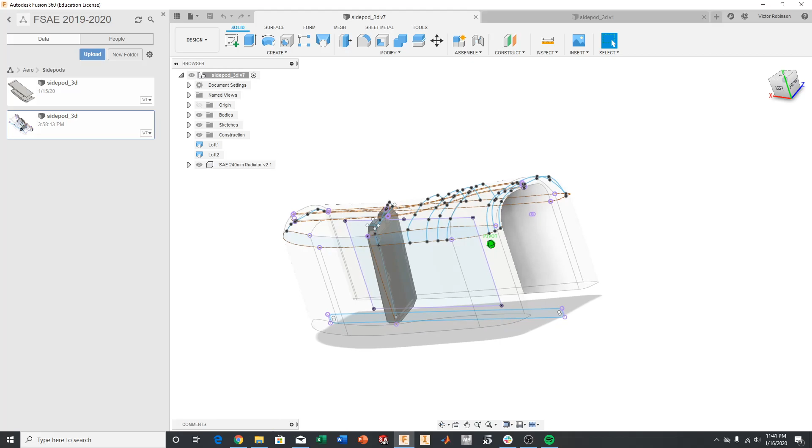In this video I'm going to show you how to loft basically a sketch, two sketches in this case. We'll be lofting these two pieces together such that you get something that looks like this. And so lofting is essentially you telling the computer or the computer software that you want to join two sketches together in 3 dimensions, and in doing so you can create complete bodies with simple sketches.

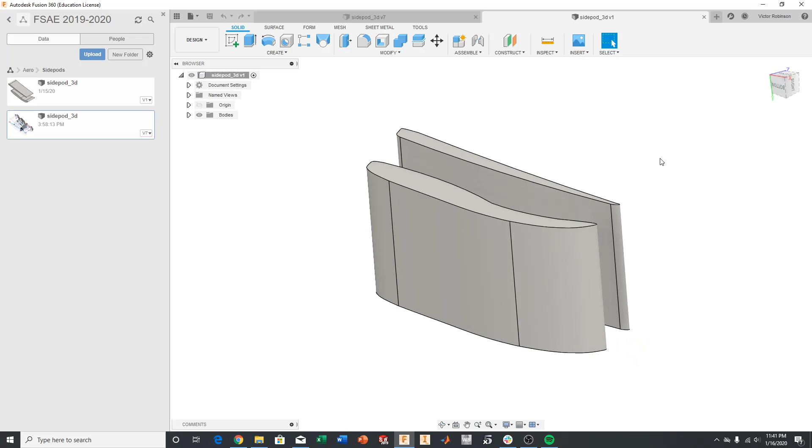In this case we are looking at a side pod, so I started with something like this. We have a sketch, two sketches here that were extruded on the upper sections in the X and the XY plane, and over here essentially is what would be housing the radiator right here in this section. If we were to look at the top view right here, the radiator would go right here, and we have the front here. So what we want to do is enclose this. We want a complete structure. We don't just want an ugly extruded sketch.

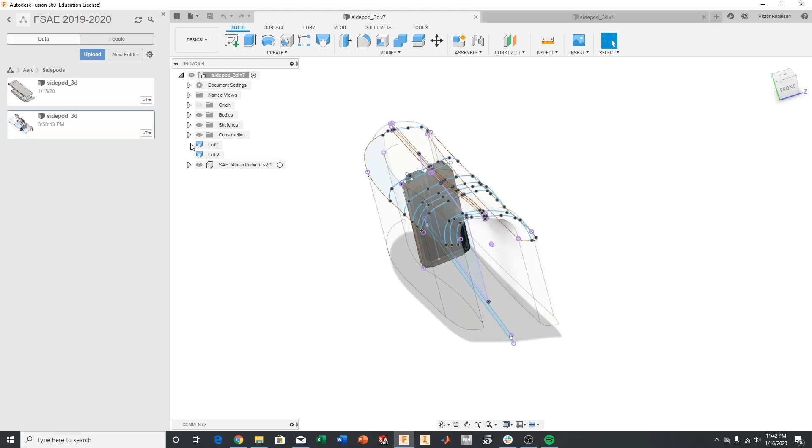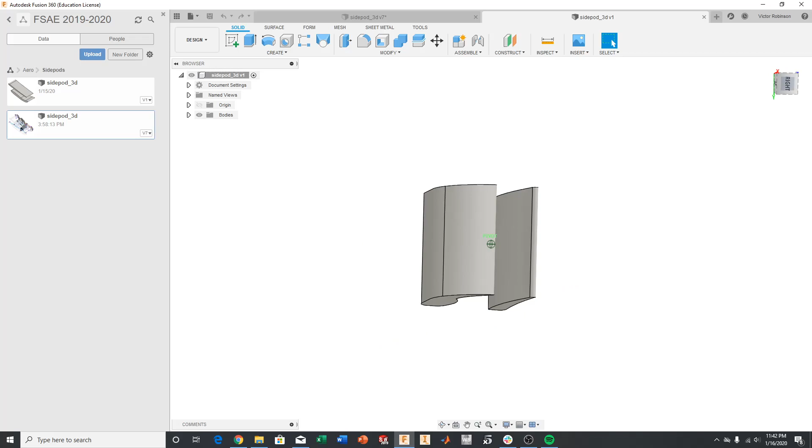So kind of what I'm showing you here is what you could expect. So let me get rid of the translucency or opacity of the object here, so you can see what it really looks like. So in this view you can see it's enclosed. I went from this view here, went from this to this, and you can see I have the radiator models in there as well.

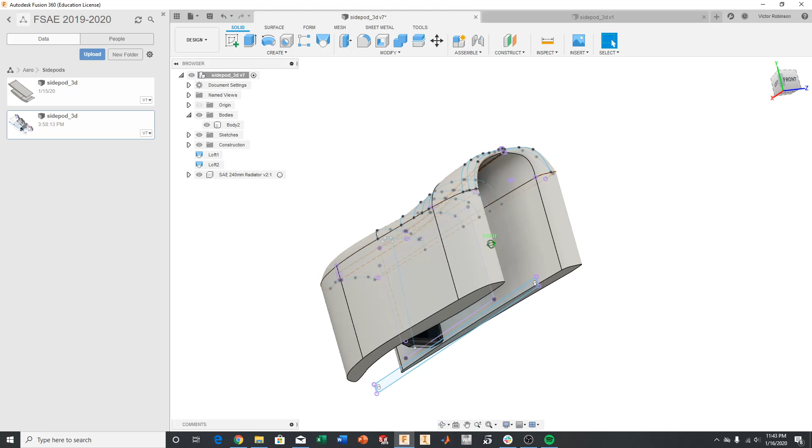And the whole idea is that this will sit on the side of the car, and so what I will be showing you then is essentially how to loft. And so I will be completing the bottom section of it, and bear with me as I struggle. Sometimes I may struggle, but let me explain a little bit here. So what I have here in the middle is another sketch. So what I decided to do is create an additional sketch in this plane here. So you can kind of see the outline I made here.

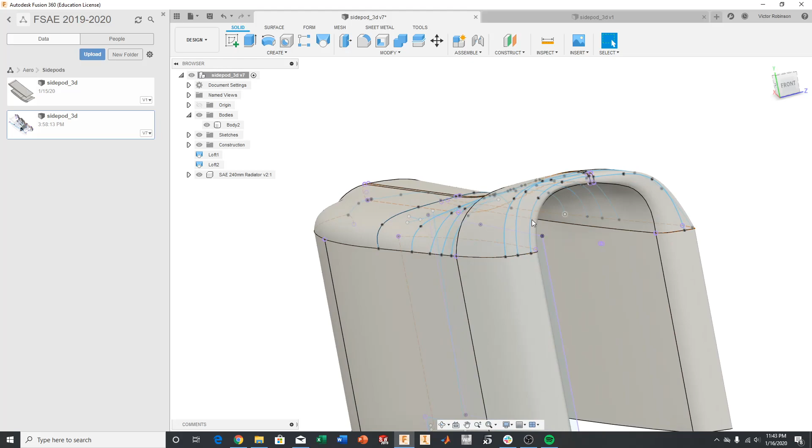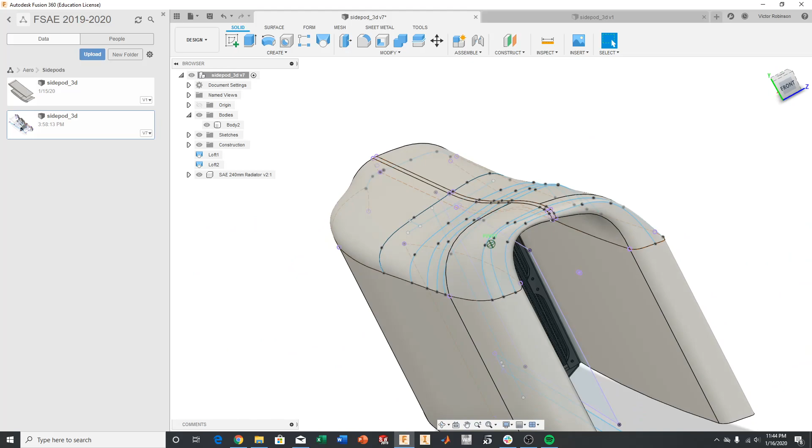What I decided to do is to kind of sketch out my general shape on the Y, or in the vertical component here, and then I would join these faces to this new sketch here on each side. That was my strategy on how to do it, so that I got the shape that I wanted. If you can see here, these blue lines are what are called rails. So essentially what I did was draw a bunch of lines in 3D. So they're not constrained to one specific plane. You can see that they move in every direction, essentially the X, Y, and Z.

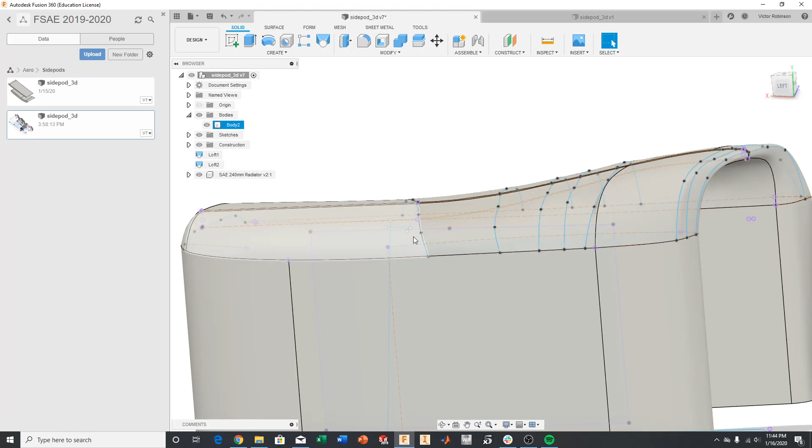And the whole idea is that I am joining these edges here, and I'm telling the computer-aided software what path I want it to travel along to complete this loft, the joining of these two sketches. Otherwise, if you had no lines or guides, and in the software they're called rails, if I had no rails, the software may get confused and may do some goofy stuff, especially with complex geometry or rough edges or weird edges. As you can see, it's not like we're joining a square with a circle. We're joining a very, in the mind of the computer, random sketch in terms of shape to the other. And so these lines here are helping guide it. Otherwise, it might not come out exactly how you envisioned.

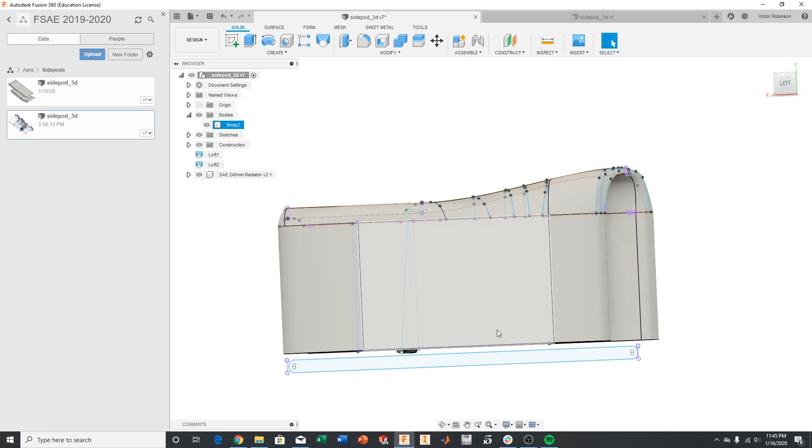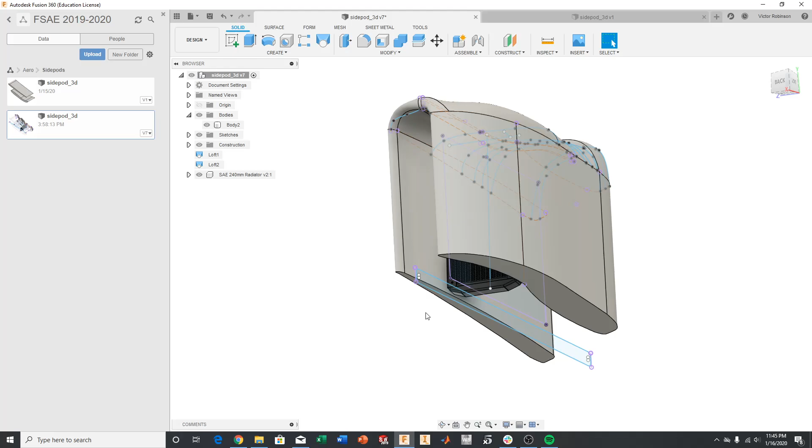So here, this is an idea of what I essentially did on this top part here. I created a sketch, as you can see, in this bottom part. And this will be our bottom piece, where I hope to join this face here to the other side here to complete our structure. Now, however I make this sketch is how the design will be at this section here. So it does matter how you make the sketch, because that's how you will see it when it's actually made. So let's get to it.

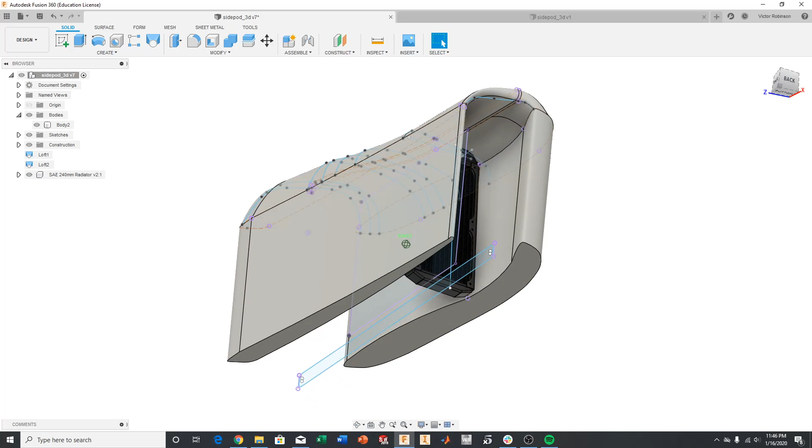So the first thing we're going to start off with, I am using Fusion 360. You can do this on SolidWorks. It's generally the same principle, just a different interface and possibly different errors, because sometimes this can create errors in the software. But on Fusion, as well as Inventor too, you can do it on Inventor. But I like Fusion because there's a lot more flexibility in how to do lofts.

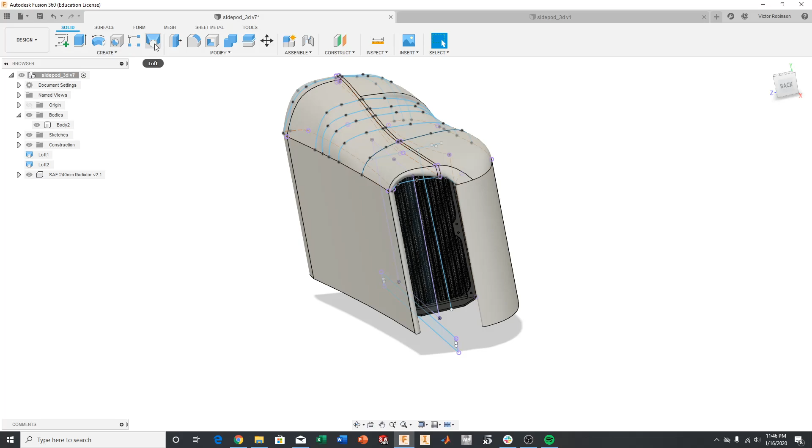So we'll start off with the functions that we have available. So if we were to go here, we have solid. This will create a solid structure, and we have a loft function. It won't show up for you here, it'll actually be in the create drop down bar, and you'll see loft here. This is a simple demonstration, but it's joining a square with a circle. So that's basically what we're doing, we're joining our two sketches to make that complete body.

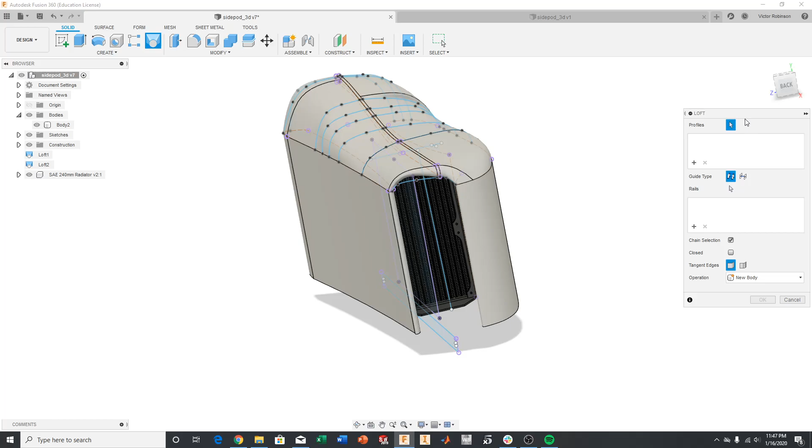And if you want, you can click on these three dots here and pin it to the toolbar, which will pop it up right here. So if we hit loft, it's asking us to choose profiles. In this case, our profiles will be this guy here, this guy there. Okay, and as you can see, it created a body.

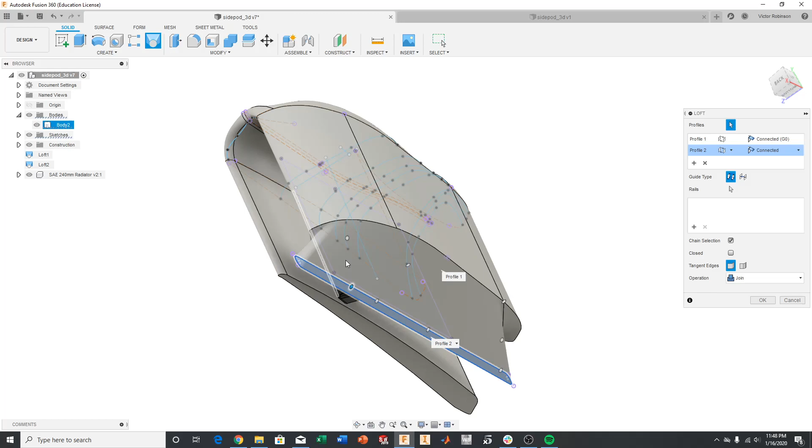However, it is not smooth at all. I think you can see it's very obvious that this isn't going to work. And this right here demonstrates the purpose of rails. Rails are going to tell the computer software how to join it, not just to draw lines and go straight across, but we want some curvature. Obviously this is really bad.

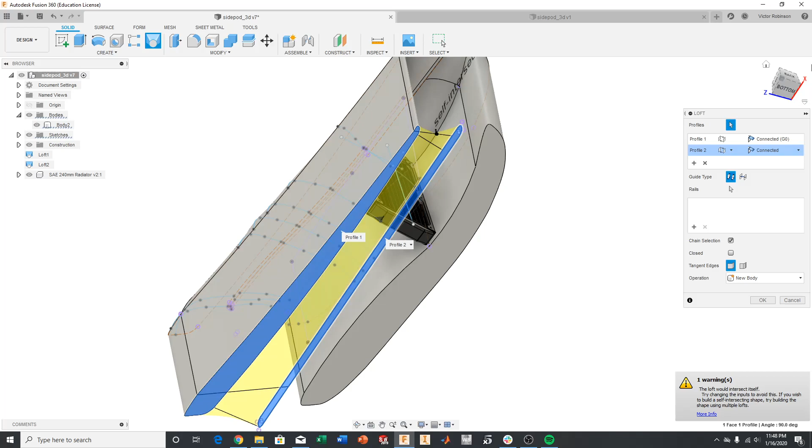And this might give me an error, but let's see if we can join this piece here. Yeah, so that gave me an error. If I were to do the other side here, loft this here. Yeah, it's not good, it's giving me an error, most likely because of the complexity of this shape here. And without rails, the computer is just confused on how to join those pieces.

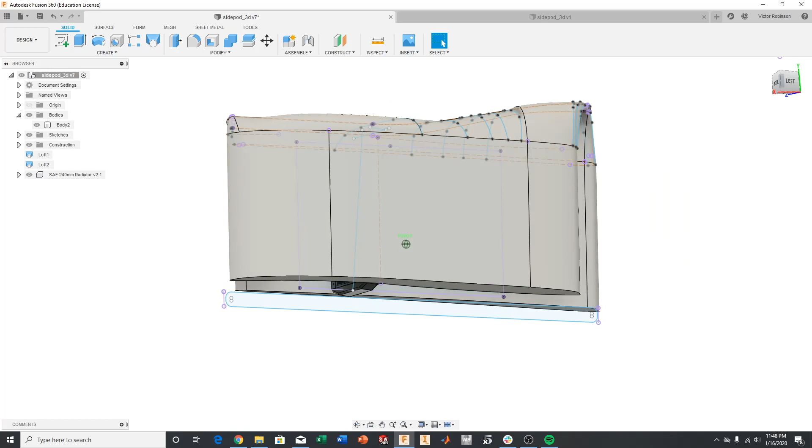So what I am going to do is I'm going to create rails. And actually, before I get into that though, the other thing that might be helpful for you, it will take some practice, but I found it of potential use. I'm not very familiar with the surface functions on Fusion, but I am familiar with the form functions.

And in the form functions, essentially what you can do is create a body, and it leaves faces, as you can see here. And with these faces, it gives you the ability to pull them, essentially mold your body however you want it. And they give you the ability to choose some generic ones to start with. But in this case, they also have the loft function, which is only available on Fusion. It's not available on Inventor, and I don't believe it has this functionality on SolidWorks.

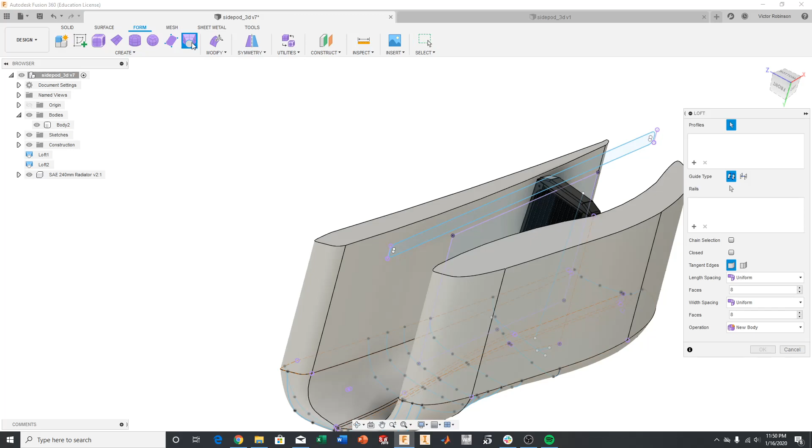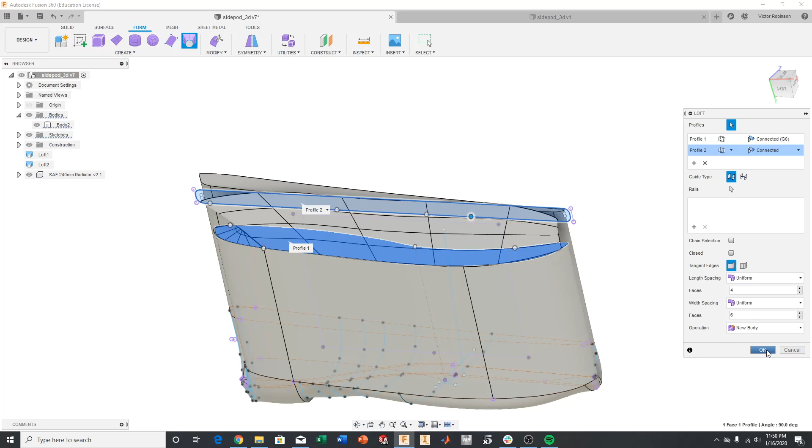But if we were to choose a loft here in the form section, as you can see, I know this is ugly, but just to describe what this function does, I can loft it the same way. It does the same loft as with the solid, except it's putting faces onto the surface, and it gives me the ability here to edit the amount of faces. And then I can put OK, and if I want, I can edit this. As you can see here, it's giving me a little toolbar here, and I can pull it.

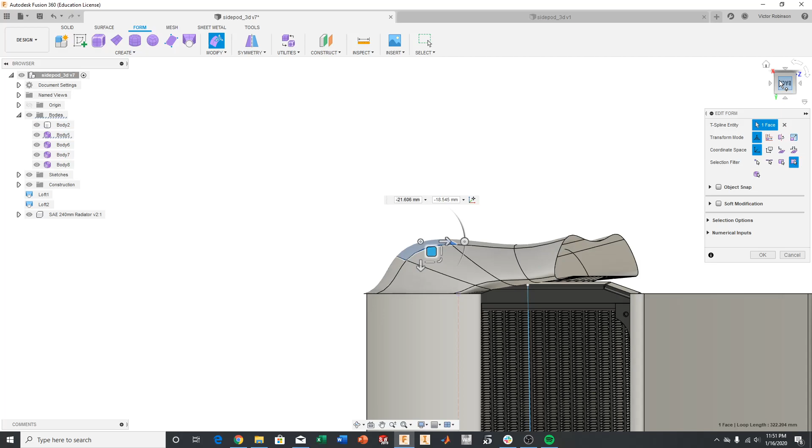Now, on this complex geometry, it's kind of difficult. Obviously, it would not be efficient to try to join all these edges and pull every single face the way you want it, because when you change one thing, it moves all the other faces because they're constrained to those edges. However, for more simple geometry, it may be helpful.

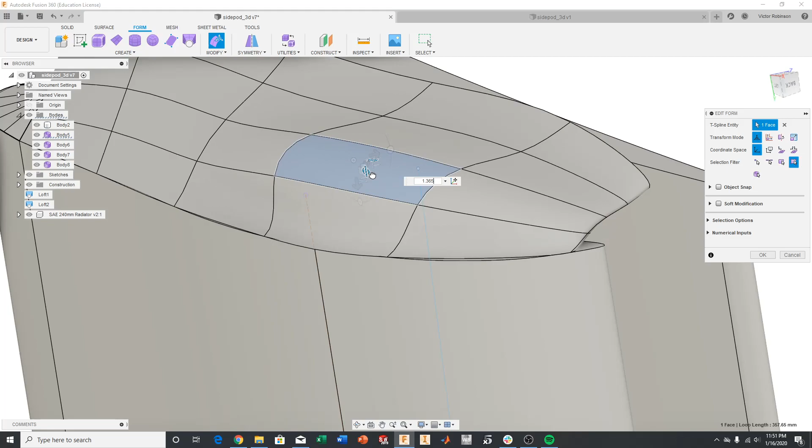Or if you complete a successful loft that doesn't look like crap like this one does, you can do a good loft, leave the faces on here, and make small adjustments on the faces. Maybe the loft didn't come out exactly how you wanted it, but you could go ahead and grab a face and tug it a little bit. Maybe it needs to be slightly higher due to those rails not being placed exactly where they need to be. You just make small adjustments here. So that's just an example of the form functionality, and I can show you a little more once I complete the rails properly. Okay, so we'll undo that.

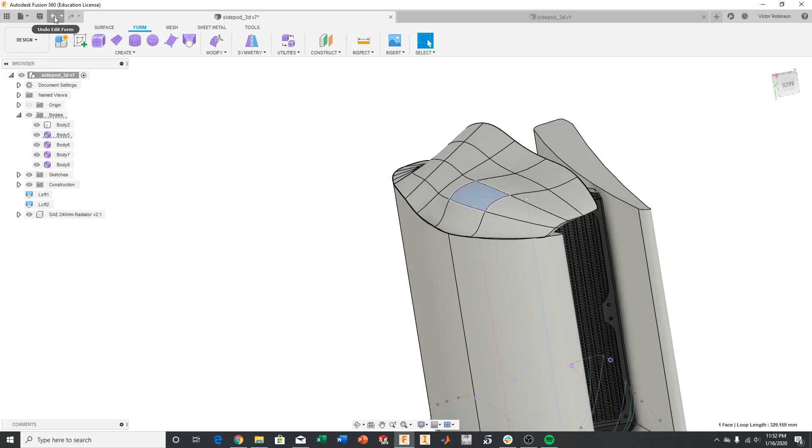Alright, so we're going to go ahead and create rails. What I'm going to do is create a sketch, but beforehand, you want to make sure you go to your preferences. Click on your name or account, go to preferences, then go to design, and make sure this box is checked: allow 3D sketching of lines and splines. Otherwise, you won't be able to do 3D sketches, and you'll be wondering why and getting annoyed. Make sure that's checked.

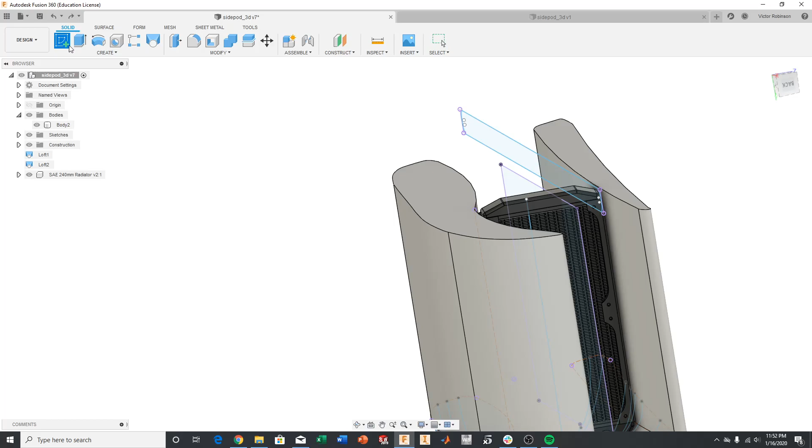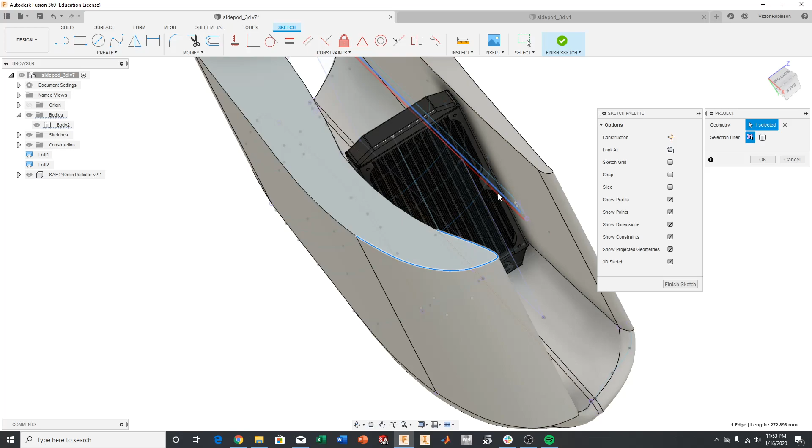So what we're going to do is create a sketch, and I'm just going to choose this plane. It doesn't necessarily matter, I don't think. Before I create a spline, I'm going to project. Projecting geometry essentially allows you to click on geometry or sketches that have already been made. The reason it's not automatically there is that it may get in your way, so they give you the ability to click on it to have a reference when doing these lines or other design sketches. I'm also going to project that as well. Now that I have that, I'll go ahead and create my spline.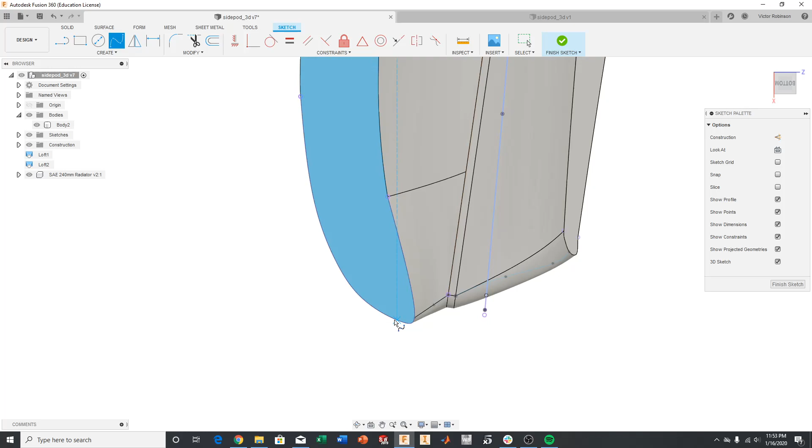I'll start about right here, and then I want to join it here. So as you can see, I chose this plane to work on, but if you look at this view, it actually gives me the ability to lock onto this sketch even though it's not on that horizontal plane.

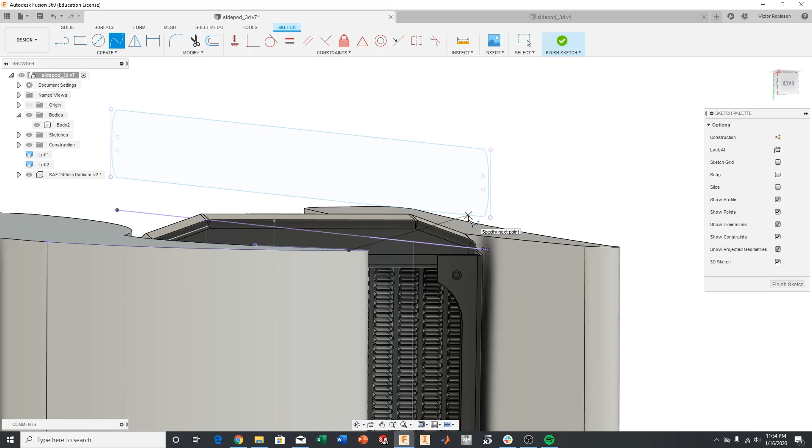Unlike Inventor, where you have to specifically click a dropdown for sketch and then click 3D sketch, in Fusion it's a little weird. It can be confusing at times, but basically you just make a regular sketch and change your view, and as long as you're allowing 3D sketching in the preferences, you can go ahead and grab another sketch here.

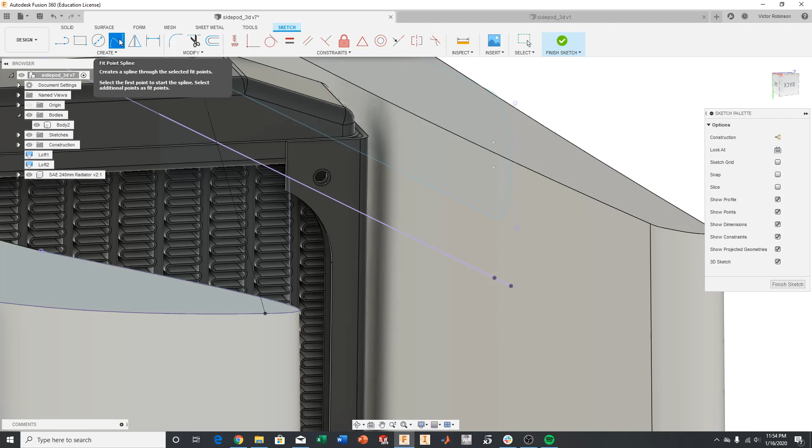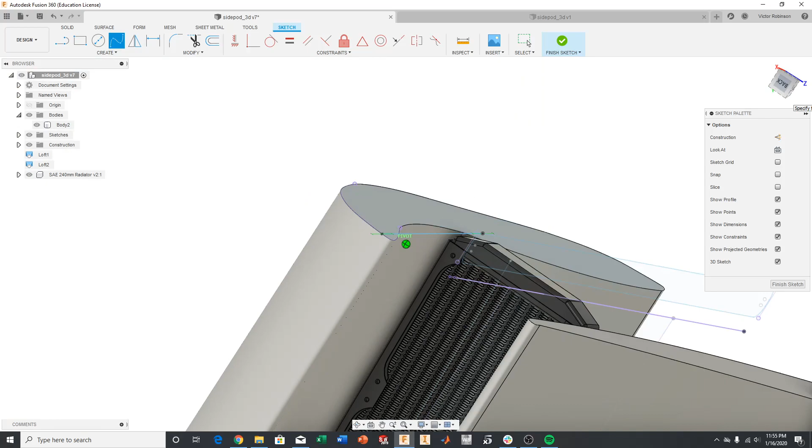So I am choosing a spline. The reason I'm choosing a spline is that I can add points into it and use those points to pull it to how I want it. I'm going to put this here because this is the outer section, and yeah, it looks about right, so I'll go ahead and check that. So as you can see, we now have a line connecting the sketch here to this sketch.

This is our rail, and what I'm going to do is just go ahead and create a bunch of these. The number you make doesn't really hurt. The more you add, the more work it is, but it will follow more closely how you want it. The more guides, the more exact it is. That should make sense.

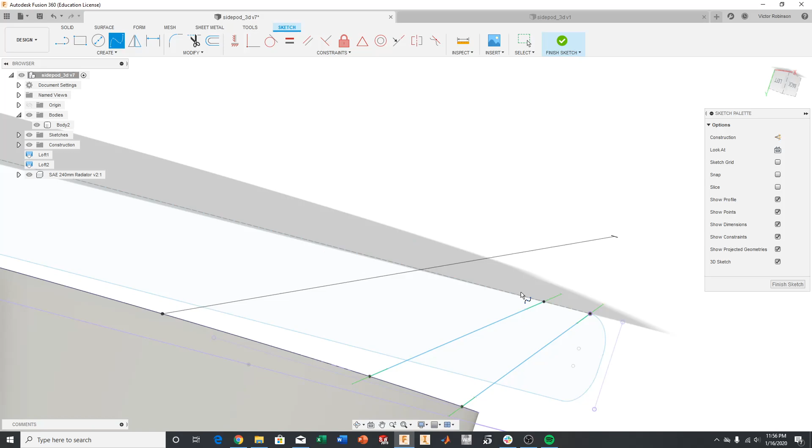I'm going to go ahead and add a good few. I think more are necessary at the edges where the part meets at the end than in the middle. That's what I found for the other section. So I'll go ahead and make one here. Yeah, it looks about right there. It doesn't have to be perfect right now because you can make adjustments.

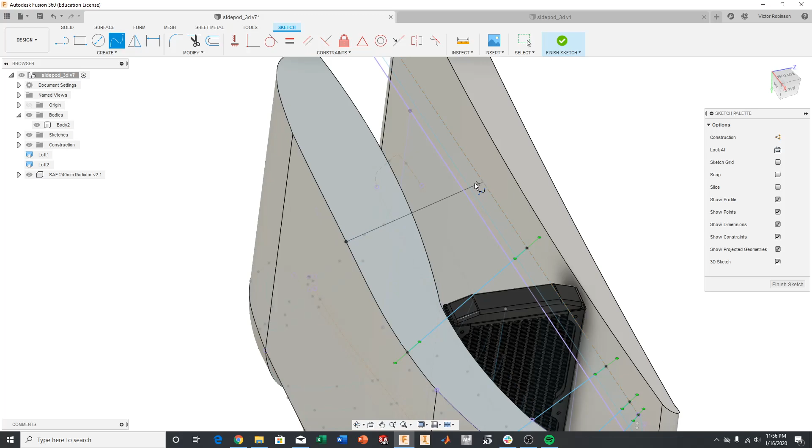You can move these points later on. The whole idea is just to have them there for now, and it's better off to do it all at the same time. We want to grab on this right here. Okay, grab right here. Good. Right there, we'll go ahead and do this edge right here.

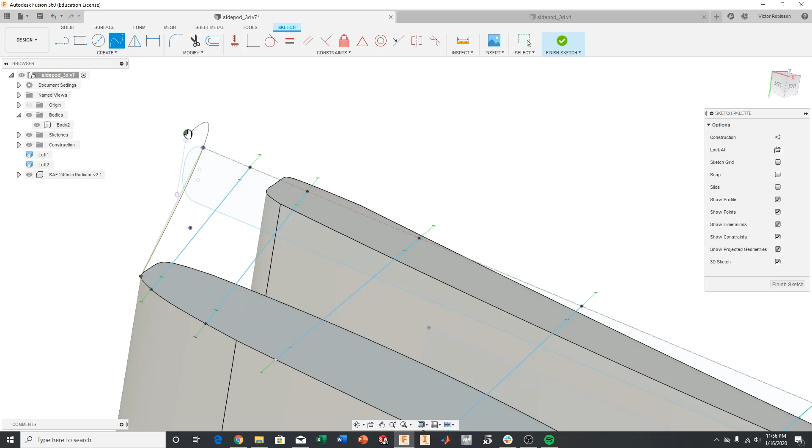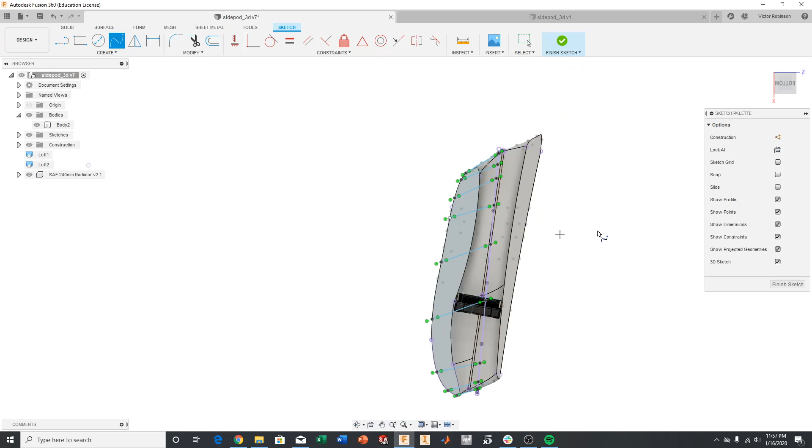So now we have our rails. Now, what I'll do is go from the top section here and line them up so they're not necessarily at this angle. I'm not 100% sure if it matters, but I'm just going to make sure they're not at crazy angles. It wouldn't make sense if I had a line here and it traveled all the way over there, as it would probably create errors or make the geometry look weird. In this case, it actually doesn't look too bad, it looks almost perpendicular to these surfaces. I'll probably shift them just a little bit, so let's go ahead and do that.

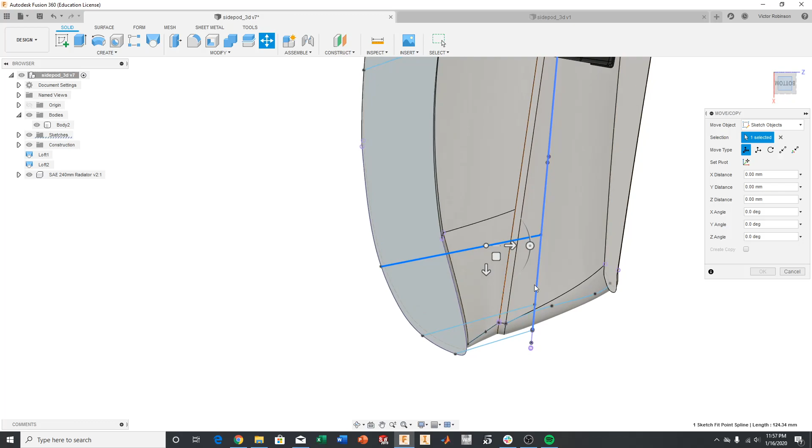So I'm going to go ahead and finish the sketch of my 3D lines, and I will be modifying these. I right clicked on that line and I'm going to hit move copy. Now I'm going to select this point here and move this point. Okay, that's not working. Let's try it this way. There's gotta be... okay.

I might have to be in the actual sketch itself to edit. I might have been mistaken. Let's see here, let's move this guy. Yes, okay. So you have to be editing the sketch, you can't just finish the sketch and try to move it. Okay, so I'm going to move that.

That's constrained there, that looks good to me. Roughly good. Okay, I'm going to go to this line here. I want to move that point. Move that, I'll bring it to about right there. That looks pretty good.

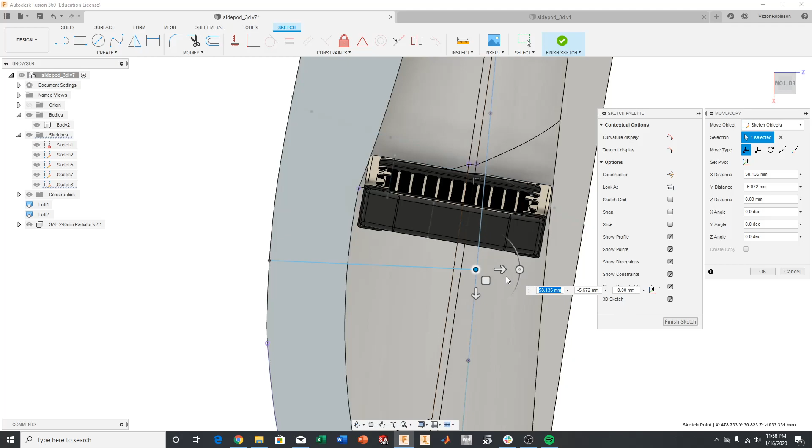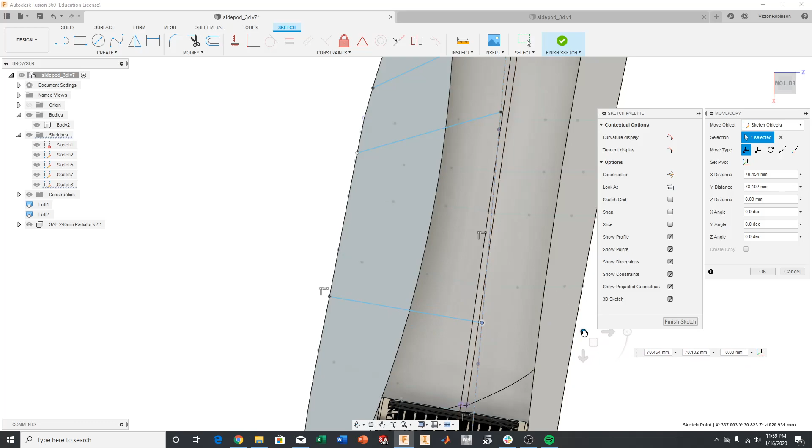Take a look at this line here. Move this, right, we'll move it at this. Okay, sometimes it could be a little finicky. We'll go ahead and move that. And it's constrained already, so I can move it all the way over here, but it's still on the line. And I'll hit OK there.

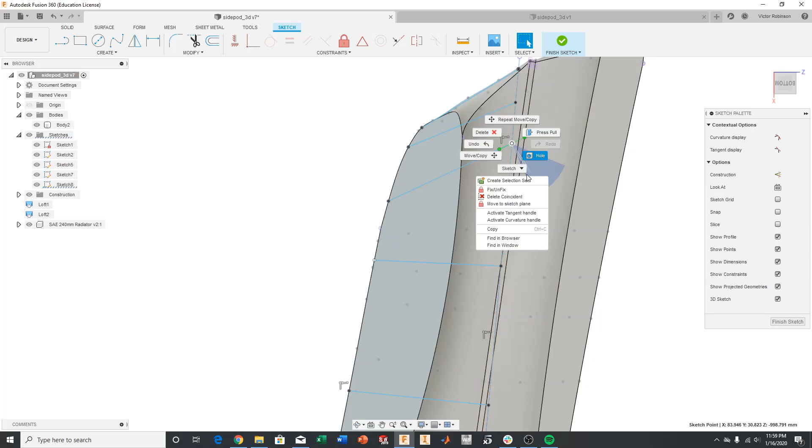So I'll be doing this pretty much for all of them. Actually, it's probably best to click the point first, and then hit move copy, and then we'll just snap on that part. Okay, so I'm just going to go ahead and do this for all of them. For this outer edges, I think I'll leave it like that, just because it has to span out that way. Okay, so now we have that.

Now we need to add some curvature to these, because we don't want the rails to just be straight lines, otherwise this is going to look very edgy. And that's not what we want. Okay, so...

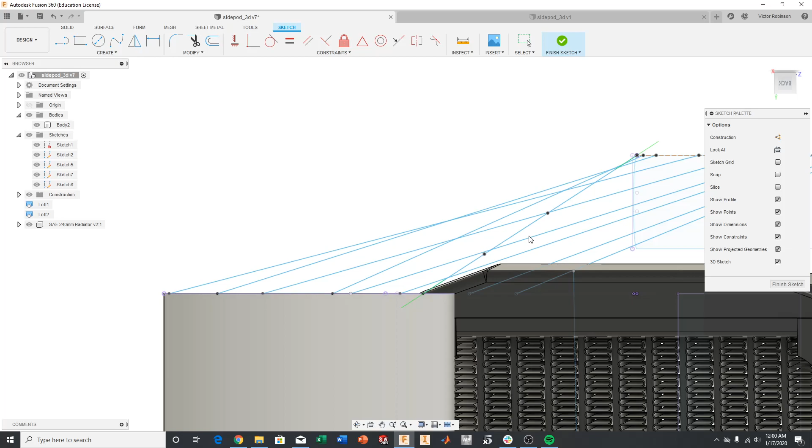I am going to click on this line, and I'm going to insert spline fit points. I found in this case, it just depends on what you're making. I'm just going to add two, because that should just be enough. Okay, and I'm going to hit escape to get out of that function. And then I'm going to do the same thing.

Make sure you're in the YZ plane, so that you're not rotating, so that you're not moving it in other planes as well. Otherwise, you're not going to be able to figure out how to do this. But move that guy up there. Okay, then I want to move this guy. Okay, go about right there.

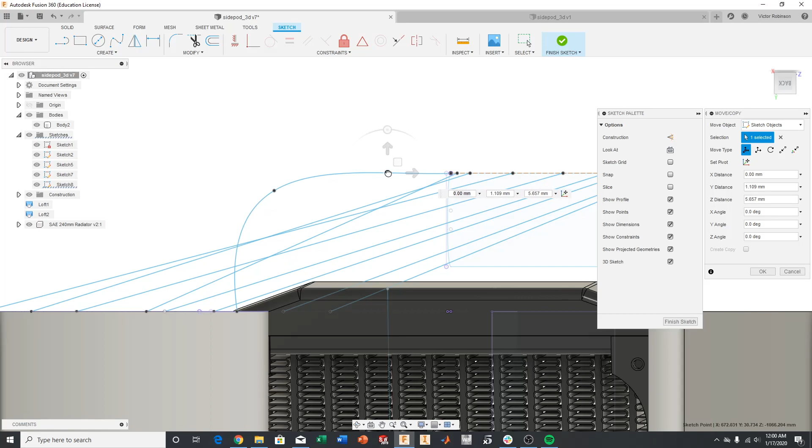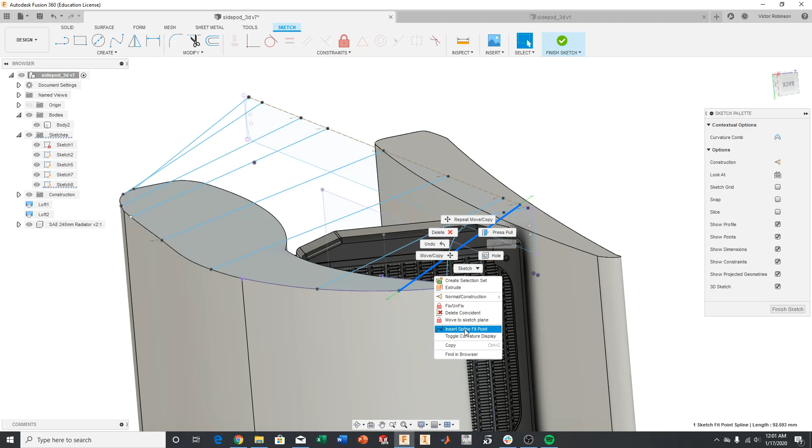So just keep moving it till you get to basically how you want it. Okay. Take a look at that, and that looks pretty good. So what I'm going to do is do that for all of them. Okay, so bear with me as I go ahead and do the same thing to all the lines.

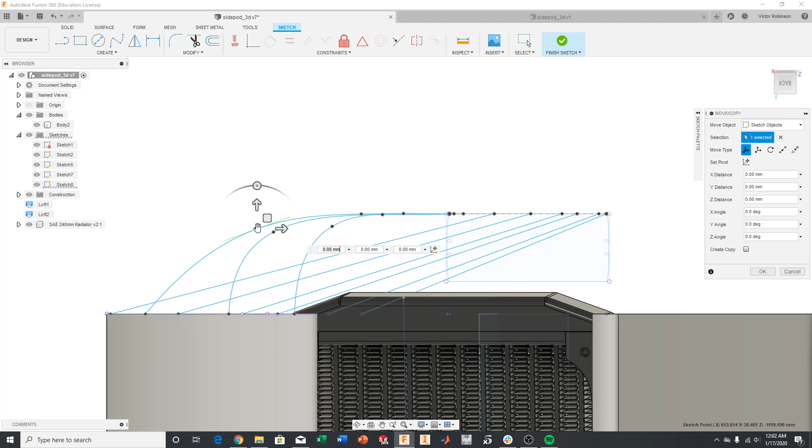Okay, and you can kind of see when I was making those changes, it kind of rotated this about. So when I'm done, I'll fix this so it's not all curvy. In the meantime, let's continue focusing on this here.

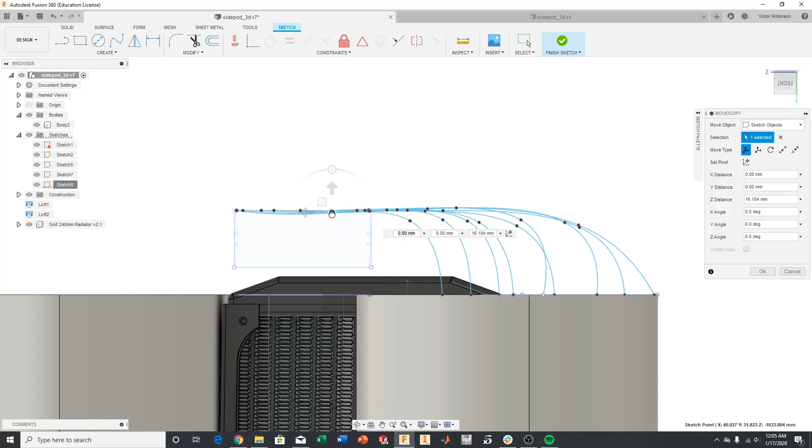Okay, so now that's done. Let's look at it from the top again, or the bottom of the piece. Okay, I'm going to go ahead and move this up like that. Yep. Make sure there's nothing crazy going on here.

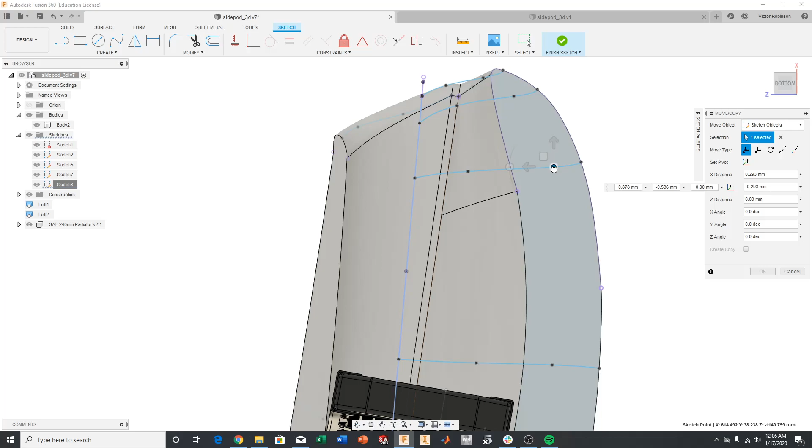So I'm going to straighten this guy out a bit here. Like that. Okay, looks good. We'll change this a bit. Yep, like that. Same thing for this one here. Smoothing that guy out, cool. Same thing here, yep.

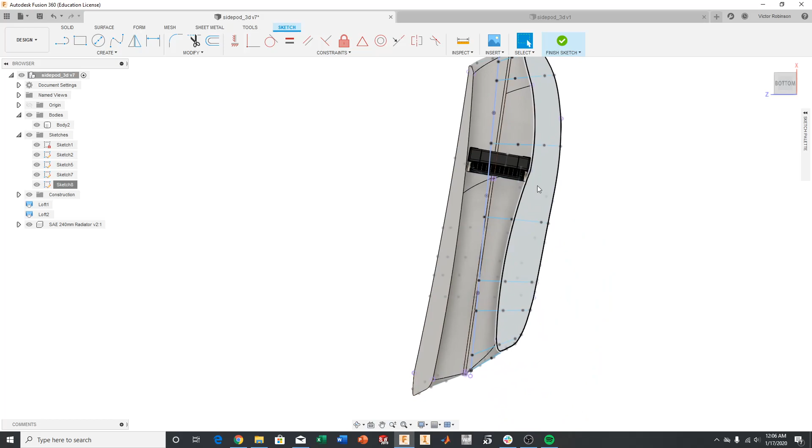Like so, yep. Alrighty, now we have our rails. Hopefully this works. If it doesn't work, it means that we either need more rails or there's something wrong with our sketch.

Okay, so I'm going to go ahead and show you how form lofting works. Choose these sketches here - you see we have errors. It doesn't know what that could do. See, it intersects itself, you kind of see it does. It's cutting in, doesn't know what to do.

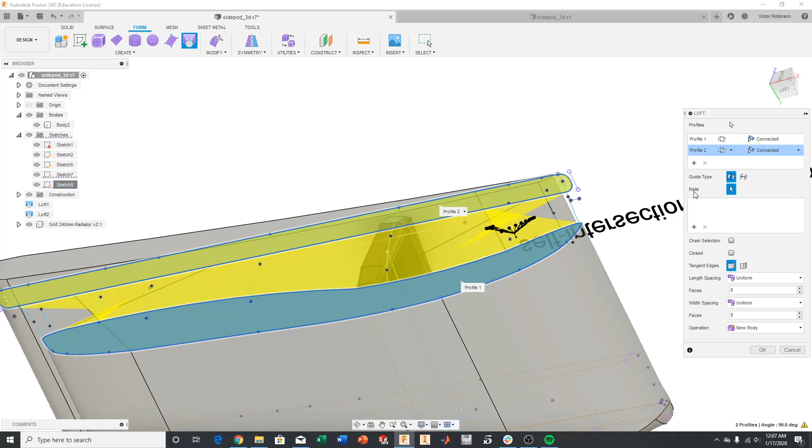Right, we're going to go ahead and select rails, and we're going to go ahead and select all these lines we have. And if this works, you will see it trying to form around it. There you go.

Okay, let's select that line. Boom, boom, boom.

Nearly perfect. Not exactly perfect, but I think you get the concept here.

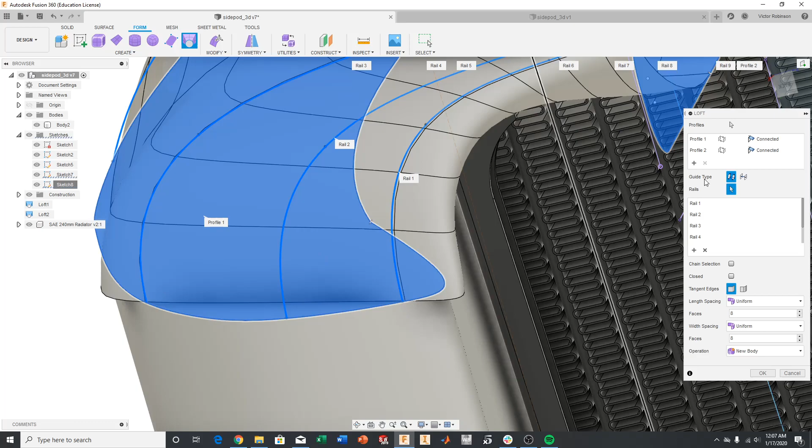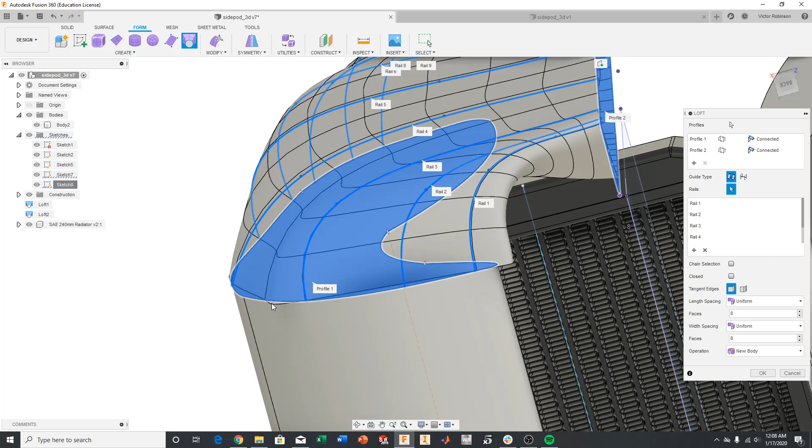In this case, you can kind of see it's going over our edges. So this would probably need an additional rail right here, so the CAD software understands. At least I found it to be this way, that if you add a rail where this is failing to conform to the sketch, the computer will have a better idea of how to shape it. Same thing here, it'd probably be beneficial to have a rail along the inside here and drop it down to avoid that overlapping.

Same thing here with this. If we were to have this here and accept that, it still needs a little bit of working, but I think you get the concept. We get this shape here, and we'd do the same thing across there. Then you're able to pull these faces too if you need to.

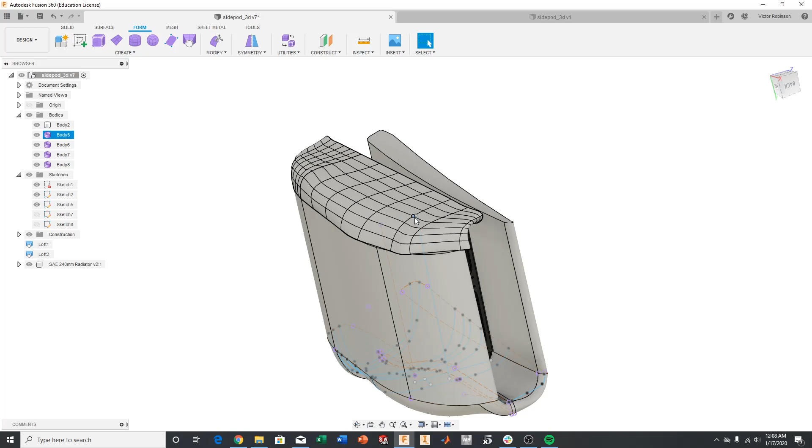Now, this is a little rough, I did it just real quick. It will most likely require me to carefully look and make sure all these rails I made make sense, which is why you get this kind of wavy structure, because some of the rails might be higher or lower than the others, so the computer is trying to follow up and down how the rail path was going.

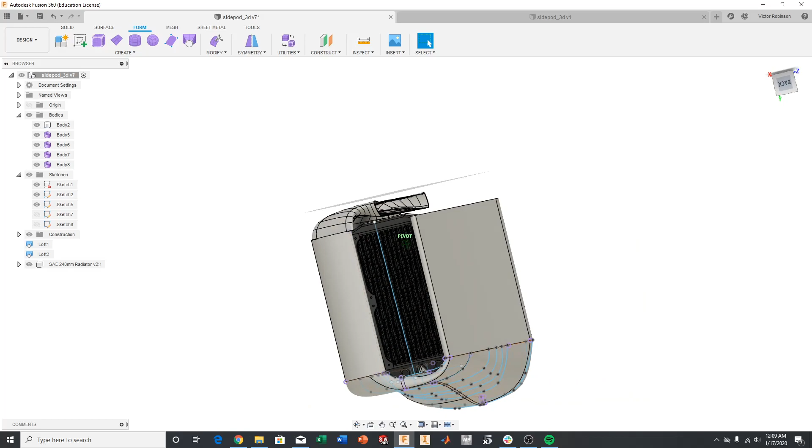So that might need working if you're having a little bit of, I guess you could call it kind of warpage, it looks like almost. But that's the form method, or you could do it another way.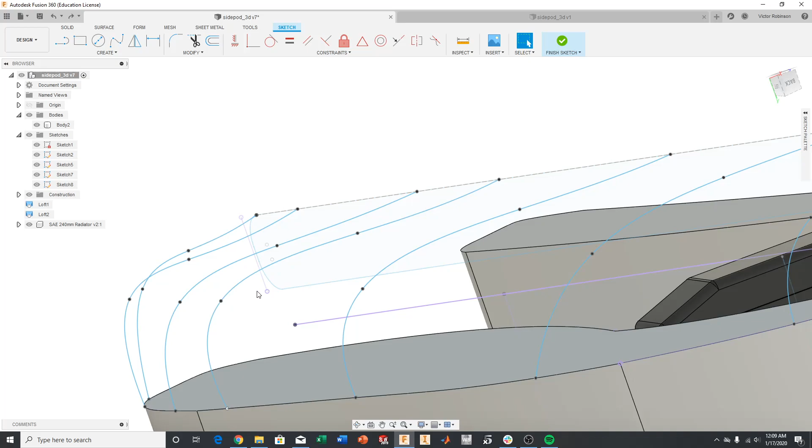The other thing is you see how this is curved out, and then it kind of goes concave, and then it goes back up. That'd be why I'm getting that weird kind of bumpiness on the surface, and I'm more so looking for a flat surface. So that would have to be lowered and just make sure it looks a little bit flatter.

Now if I were to do solid, select the sketch here, select that, same idea. We'll select our rails, and because it's not in form, you don't get all those lines, so it looks a lot cleaner.

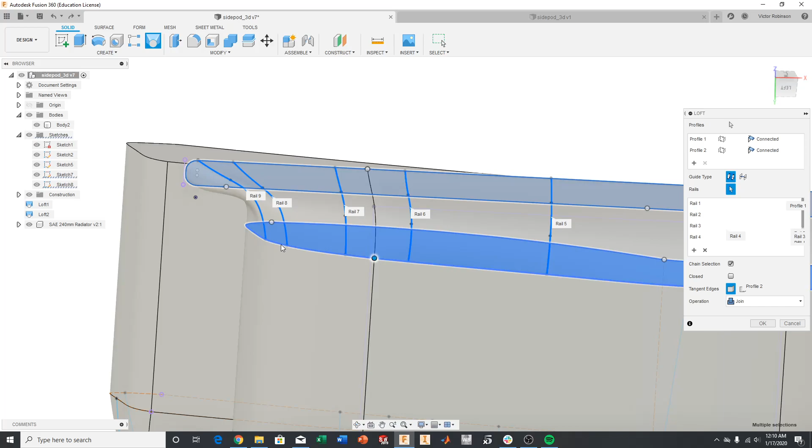So this might be better. It really depends on just what you're working with, but this is a good way to see much more clearly. And actually, it appears like in this method, it lofted it perfectly, there's no overlapping. So we'll finish that.

And yeah, actually, that is darn perfect. So that makes me really happy.

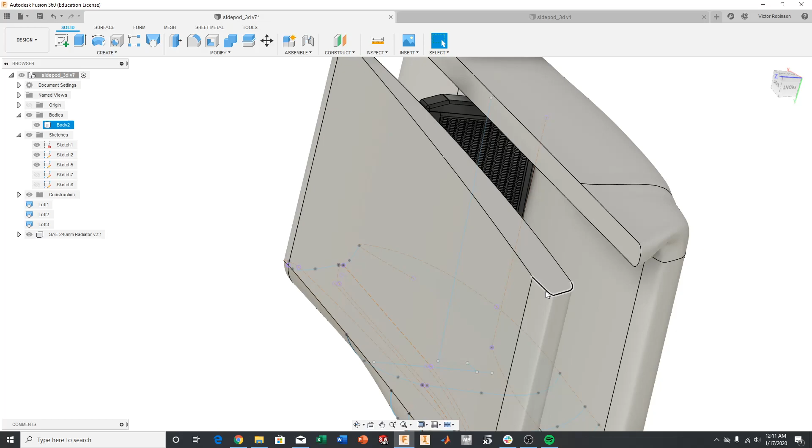I'm not going to show you this, but it would be the same concept to match these sides. Rails, loft it. If you're getting errors, you need either more rails, or your rails aren't actually touching the edges. Your rails have to touch the edges because they're defining the outer or inner limits.

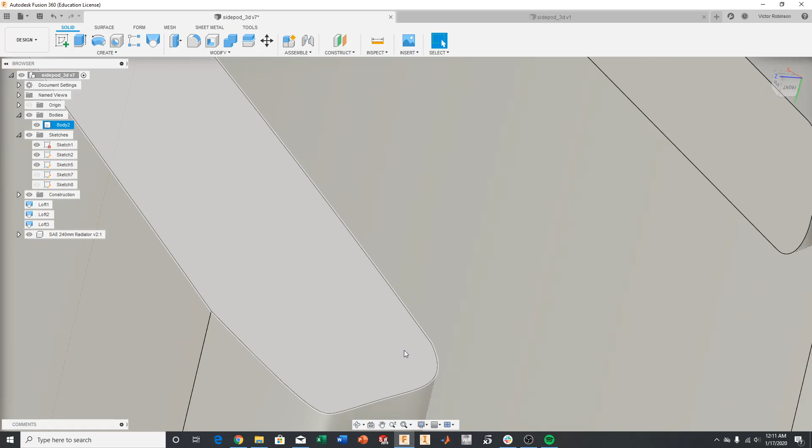The perimeter of your loft - if you have lines going on the outside or on the actual surface, that's not going to work. It's going to result in intersecting surfaces.

Yeah, it looks pretty good. I might want to edit this curvature here to kind of flatten it out there, but yes.

Another thing, I guess I might as well just show you my mistakes. Now that I did that, I realized that would work. What I had done here is I made a sketch and extruded it a little bit, so you can see it's kind of flat here. Just going from this, you don't have to extrude that sketch. I made that mistake and I learned now you don't have to. I was getting errors though, which is why I did it. But if this works successfully, then this should work successfully too, so I'll be making these tweaks.

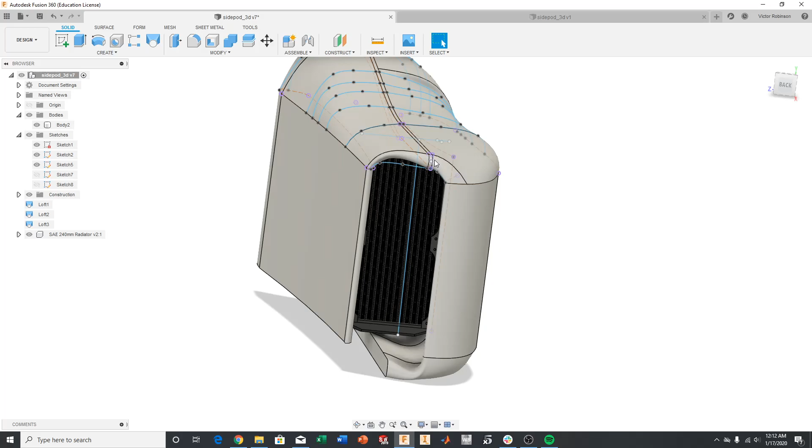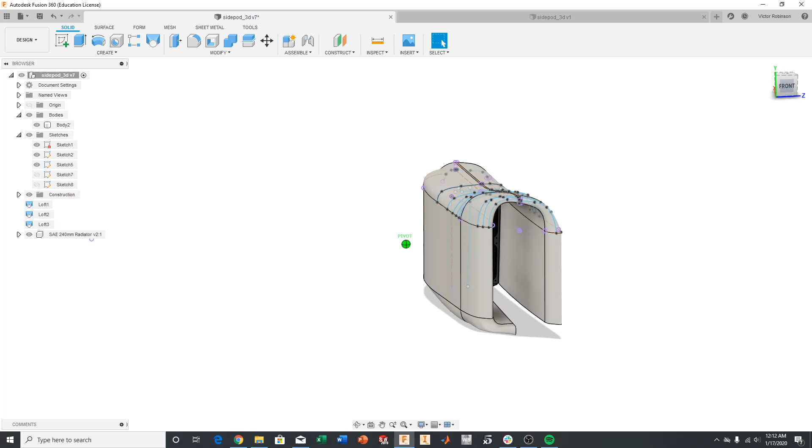But hopefully this helped you. This is the side pod of our car, so it's looking really good, and I'm excited. Hopefully this lofting tutorial will give you an idea on how to do simple lofts and more complex lofts like these. So thanks for watching, and have a nice night.